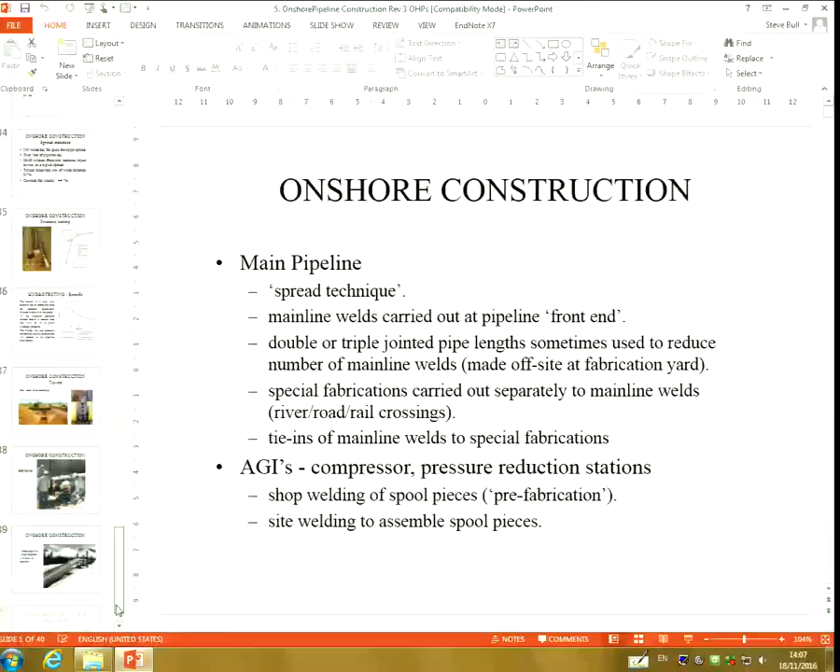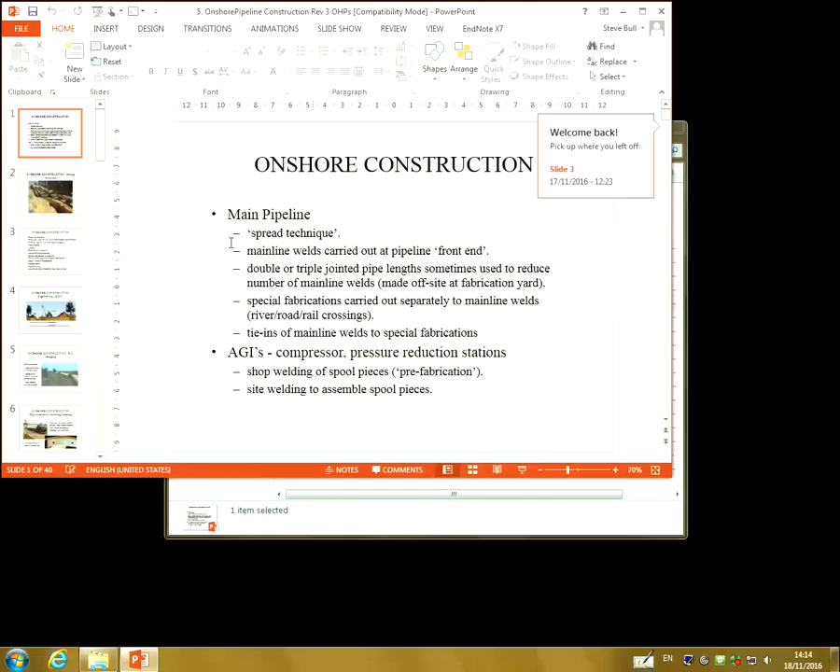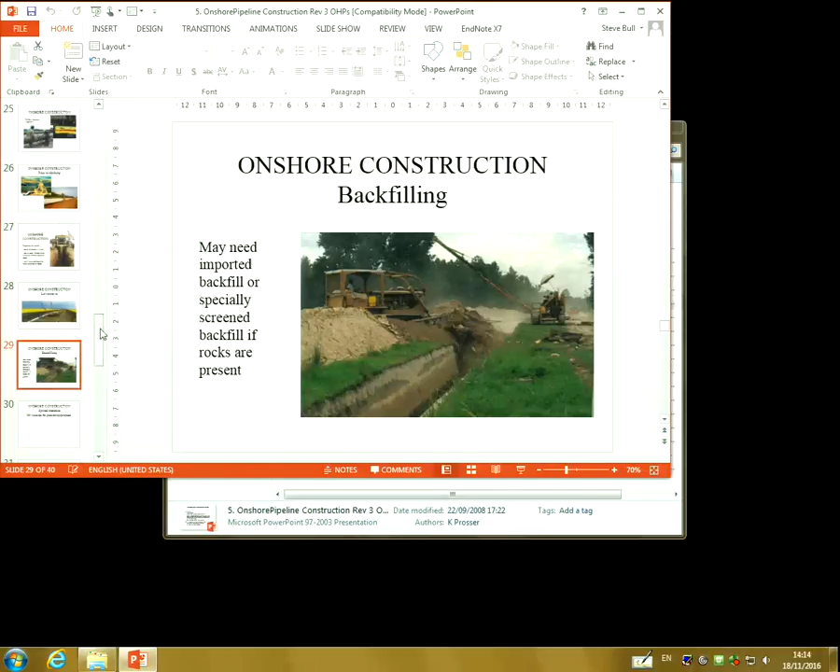I'm struggling. What I'll try and do is sort of get through it with this thing, and I'll sort this out. But by the time I phone the AV people now, they won't come and fix it. I want to try and get a few things said today, at least.

So we talked in the previous lecture about making pipelines, and the last thing that you want to do is pressure test them. Now you don't pressure test the whole pipeline, you pressure test them in segments, and they usually pressure test when they're in the trench, when most of the pipe has been backfilled, and there are a few overlaps because you have to weld on end caps to maintain the pressure inside the pipe, and then those when the pressure testing's been done, those will be cut and joined to make a single pipeline afterwards.

So it's an on-site activity, but the pumping activity for the water that does the pressure testing could be miles away from where you actually measure the pressure.

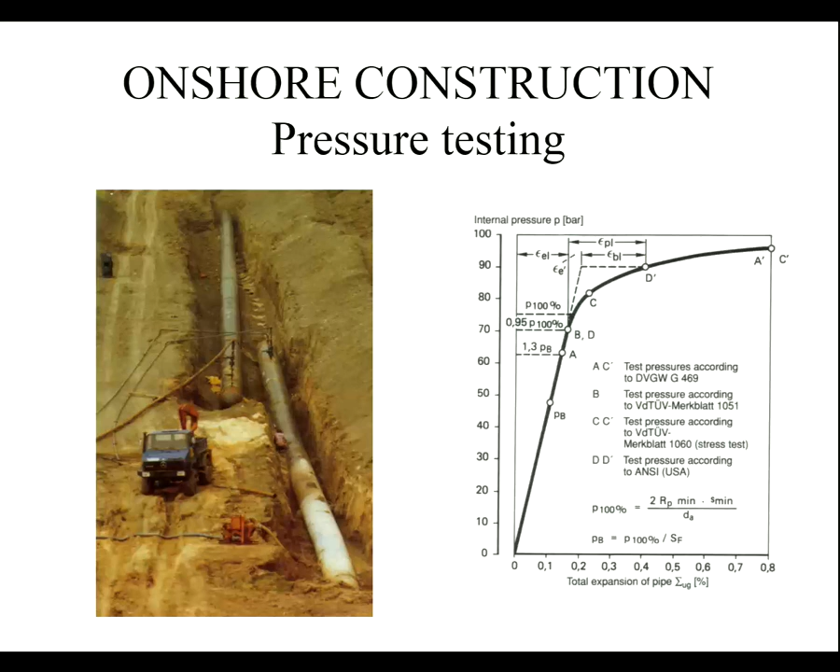So the benefit of a high-level strength test is effectively it takes out all the big defects, because if you fail that pressure test, you have to go and repair it, and then you've repaired it usually with good defect-free welds, so you're not going to get any problems. And so operational failures, which occur later, tend to be much, much less likely. So if you put a high enough pressure test in, that's okay.

So basically, if the pipeline contains defects above a certain size, then you're going to have a failure in the hydro test. And if you repair the system and get it to work, you've screened out all of those big defects. And hopefully that means that if you do a second test, the smaller defects that remain would require a higher pressure to fail.

This graph, if you could see all of it, shows the pressure of failure against defect size, and you can see as the defects get bigger, the pressure is smaller that you need. So PO would be the operating pressure that you wanted to run at, and PT would be the test pressure. If you run at the test pressure, these small defects will actually fail, and anything bigger than that would actually fail.

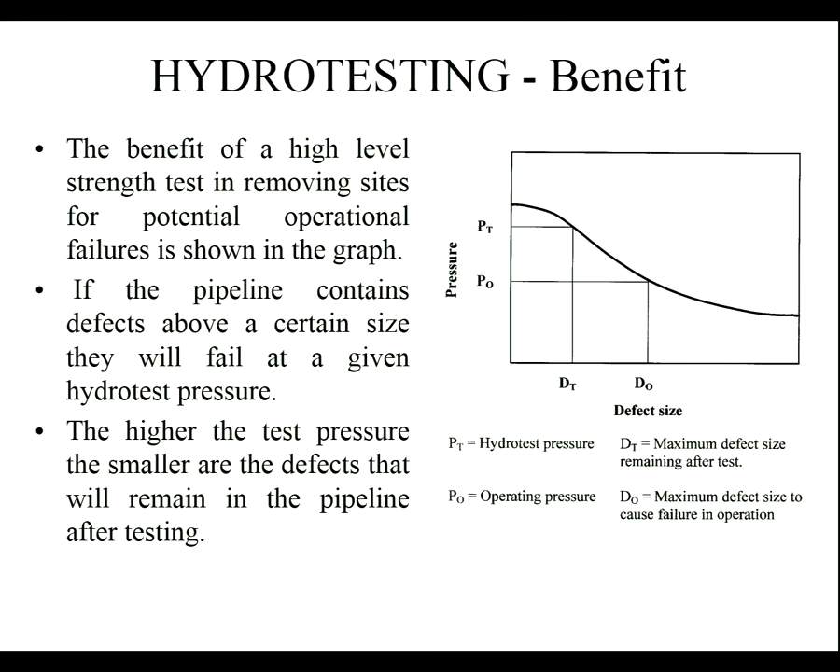So hopefully you've got a set of defects in your operating conditions which are much smaller than the defects that would be required to cause failure under those conditions, if you do the hydro test correctly.

You have to think about different activities when you look at road, rail, river crossings. So this is a road crossing here. You can't usually dig up a road and leave it out of commission for months while you do a pipeline. So normally you put a tunnel underneath, and the pipe segment is inserted in the tunnel and everything's done properly. And then the ends just sit there waiting for the pipeline to catch up.

And you can then have different types of clamps to hold it together. So this isn't an internal clamp, this is an external clamp that can be used to hold parts together, and you weld in the gaps. You can't quite see it in here, unfortunately, on this picture, but you need different equipment for dealing with these tie-ins. That's the point that I'm trying to make.

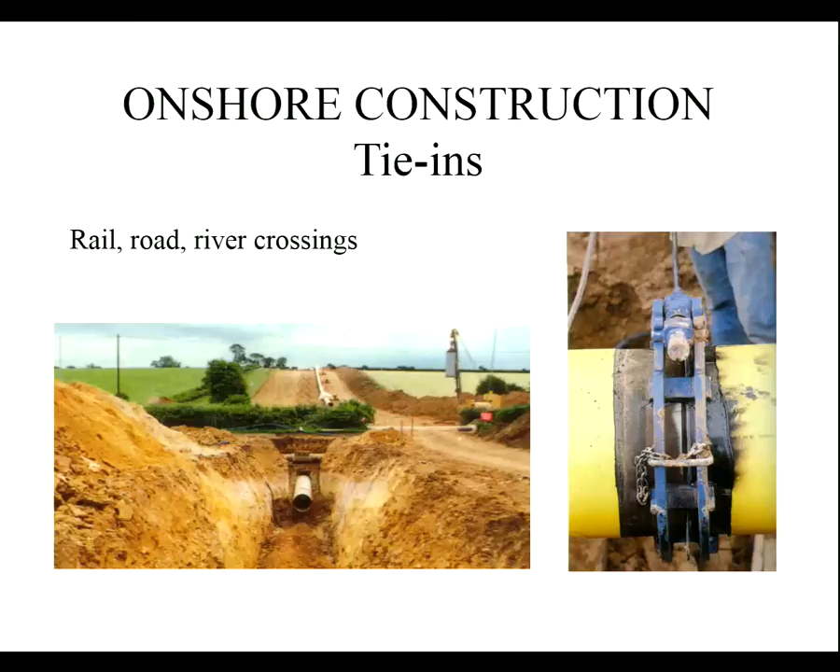Because you can't rely on an internal clamp being pulled all the way through as you do with normal manufacture, you probably wouldn't be able to get it into some of these tie-ins, because sometimes there are bends that you have to put in that are quite sharp to make sure you match up the pipe to the crossing, and the crossings don't necessarily go perpendicular to the pipe. They can go at some strange angle, and it can be very difficult to sort things out.

So sometimes you're putting tie-ins into a pipe and you're actually running gas through the pipe. You may have a situation where in order to maintain productivity you have to connect a spur onto a pipe, and that tie-in may be done with the pipe actually filled with gas. That's a different set of processes completely.

So by hot tie-in, I don't mean to say it's hot while the guys are working there. That means that the pipe is live. And if you do anything to cut through the pipe or let gas out, when you've got flames around from preheating torches and things like that, the whole thing can go bang. So you have to have a very careful team that knows their procedures very well to ensure that happens safely.

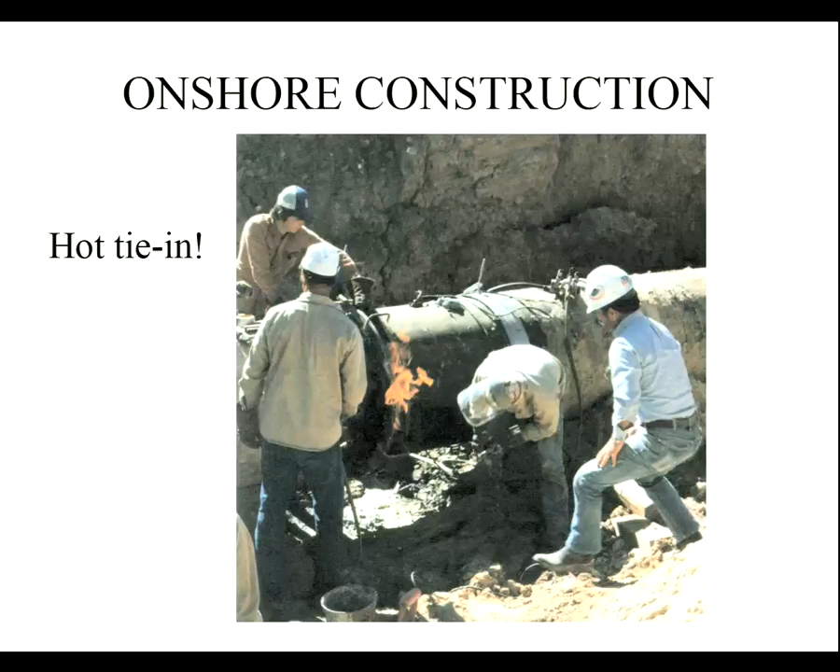In Canada and in Alaska, we can't trench because the ground is frozen solid and the permafrost is too difficult to dig through. So pipes are above ground mostly, and they have to have protection from extreme cold and extreme warm temperatures. So the pipe supports and the externals to the pipe have coolers, and sometimes trace heaters to maintain the pipe in a stable temperature situation.

Cooling is usually more necessary because the product flow through the pipe actually leads to some heating of the material. So you sometimes have to deal with that heat, particularly in hot places, and the fact that you've got good solar gain heating of the material if it's sitting above the ground. So it's the temperature changes which is the problem. It's not so much that the pipeline's at a high temperature or a low temperature, but it might be at a high temperature in the day and a low temperature at night, and you have to have heating and cooling systems that try to minimise that variation. So there's extra facilities necessary for doing that.

We don't in the UK tend to worry, we just dig everything in a hole. Things like the underground temperatures are fairly constant, about 5 degrees I think in most cases. So it's not something that I can tell you much about, but I know it happens.

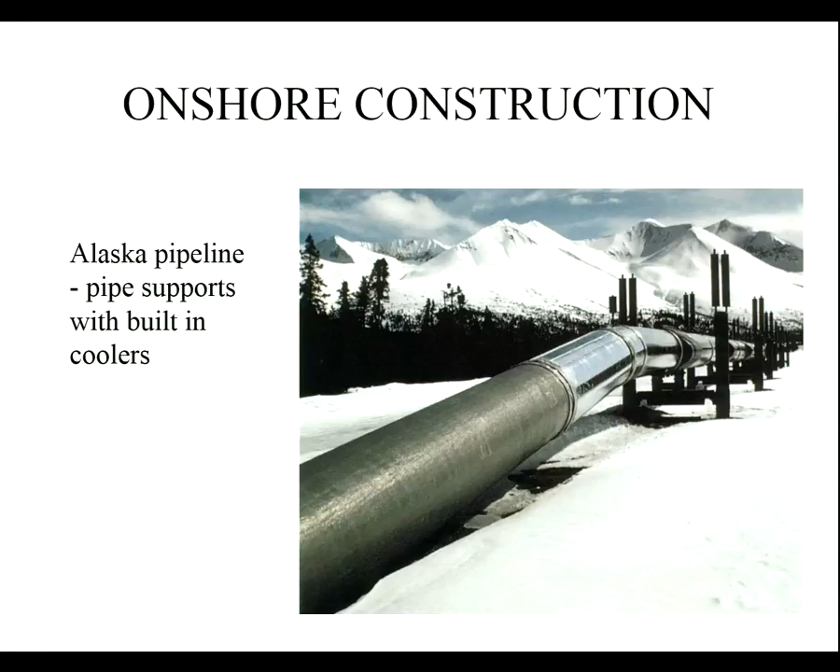And now, if you are able to deliver that long section of pipe to site, and if it's flat enough, and if there's lots of ifs there, then you can do that. These types of processes are much more common in offshore manufacture because productivity is so much more critical in those cases. But imagine if you've got a complete pipe length which is 3 times as long, then you've got 3 times the productivity when you're on site because you can do the same number of welds per day, and some of them have already been done.

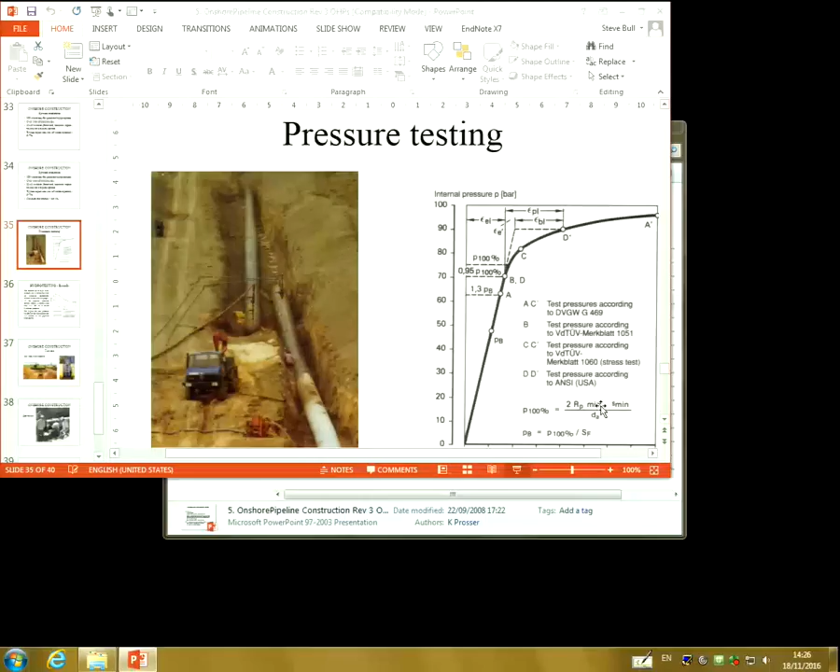Okay, so that's the onshore pipe construction. What I want to go on to talk a bit about is the welding processes that are needed in a bit more detail.

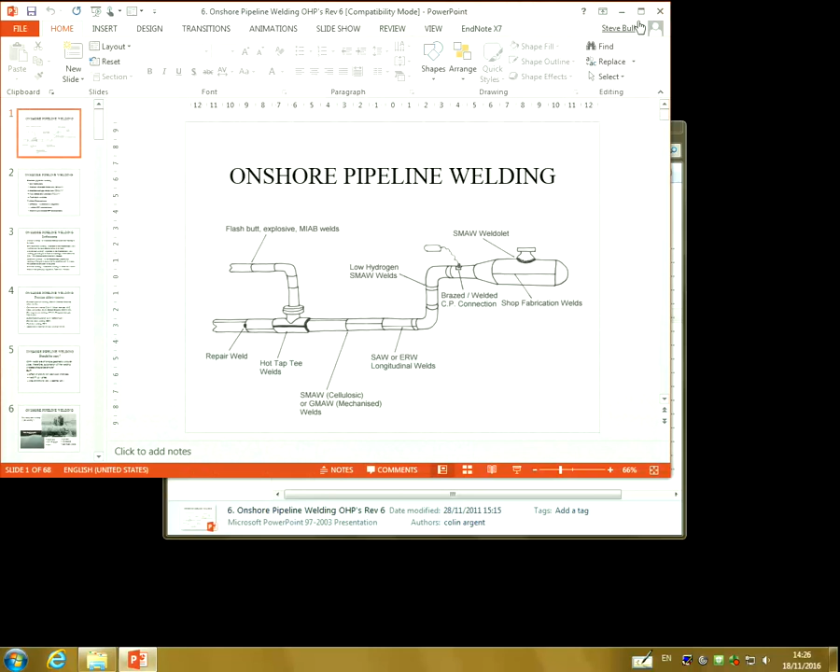Now we're losing about an inch off the side of the slide. I'm sorry, I'll read what I can for that, but it's the best I can do at the moment.

We have lots of different welds to make a pipeline. Lots and lots of different welds. So you've got our longitudinal welds in our UOE pipe, let's say. We've got the girth welds. We've talked a bit about those.

You've got a hot tap, so you've got welds holding this split T in place. You've got welds holding elbows and joints in place. For some of the smaller tapped pipes, you might have a different set of welding processes, like flash butt welding for instance. You might have perfect welds, and every now and again you've had to do a repair, so there's a repair weld.

When we go out to pig traps and things like that, we have things coming out of the ground which have more variation in temperature, and you may want to be more careful about your welding procedures, so you might have some low hydrogen welds. Then you've got to put cathodic protection attachments on, and those might be brazed or welded. And then there's a weldolet in here - we talked about weldolets in the fittings because we want to get an access port into this pig trap.

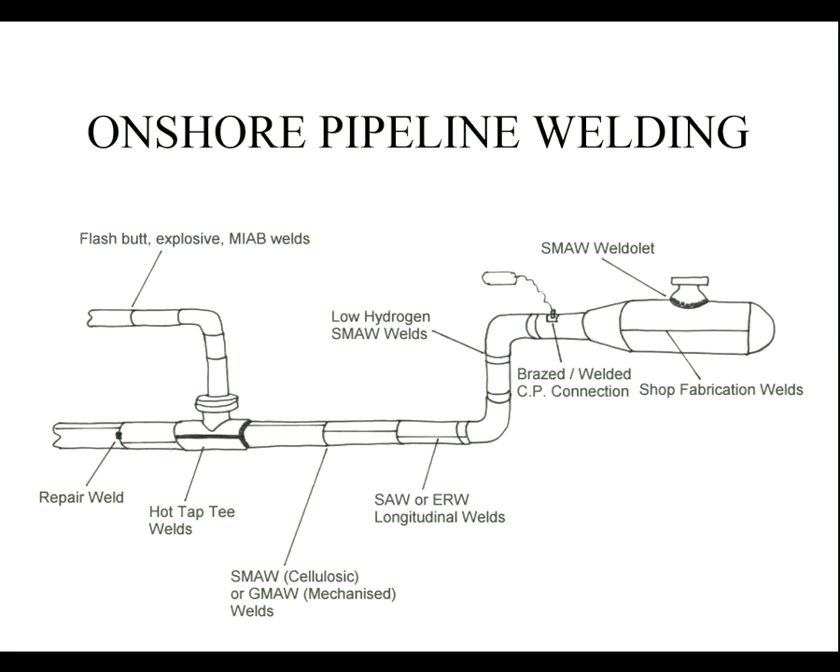So over the years, a number of different processes have been used. Onshore pipeline welding initially started with simple oxyacetylene torches. Acetylene has got the highest energy content of all the gases available, so we can get the highest heating of a material from an oxyacetylene torch compared to any other gas used with oxygen. But you still can't really heat thick metal up - it's only suitable for rather thin metal systems. So nowadays oxyacetylene is used largely for preheating in the industry rather than for actually welding.

Manual shielded metal arc welding, manual metal arc welding, stick welding - that is the common on-site welding technology. It can be mechanised, but not easily. But there are mechanised gas metal arc welding systems, so that's gas shielded metal arc welding or MIG welding in this country, where you have a gas cylinder that you have to take with you that provides the protection. The manual systems, the stick welding, it's the coating on the stick that provides the protection of the weld, so you don't have to carry a gas bottle with you.

Sticks are relatively short, so long - when you've welded that material, you've got to eject it and get a new stick. So those welds have start-stops in them, and that's not so good. So flux cored arc welding was designed to have some of the benefits of the mechanised gas system without having to have a gas supply. So you have a tube of weld metal and you put the flux that provides the protection on the inside of a tube, and then you can wrap that up and feed it like a wire into the process.

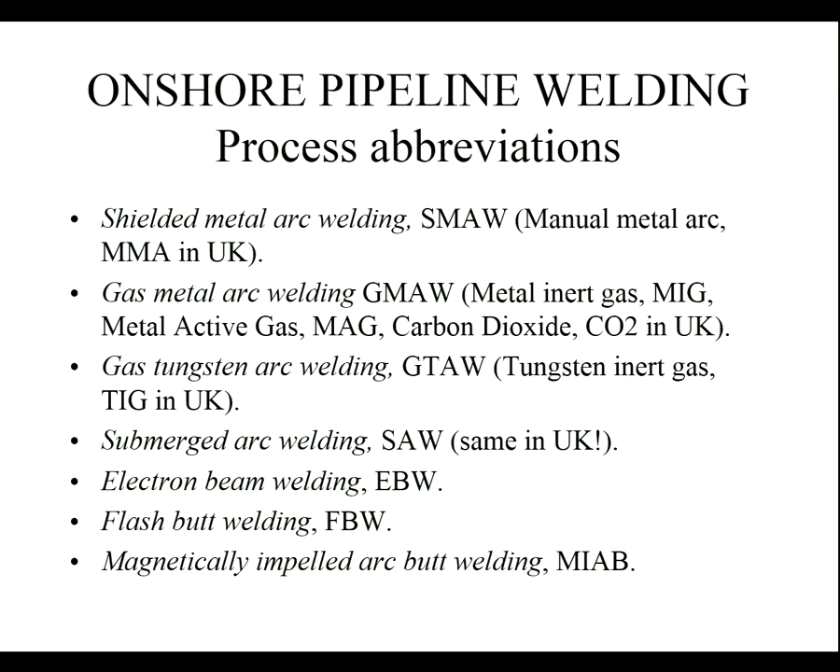Okay, again I'll have to read what's off the edge. Onshore pipeline welding, we think it should be easy, shouldn't we? I mean, welding's been known about for years, we've solved all the problems with welding, we know exactly what to do. And therefore, if we know exactly what to do, we should be able to automate it very easily, shouldn't we?

I mean, we know what the problems are, we know what the targets are. There are many, many manufacturers of welding equipment. They should be able to come out with a solution every time.

So what are the problems? Well, the problems are largely to do with not the welding process, but everything else. When you actually set up a lot of welding processes, you weld down onto something with a weld pool, which you can look down onto. So the weld pool is held in place by the material around it.

Now you're welding one of these pipe ends, you're welding downwards vertically. So you've got to worry about the effect of gravity. And whether you weld upwards from the bottom or downwards from the top makes a difference.

What about fit up? If you put two pipes together, if they're nice and close and everything's perfectly spaced, welding is straightforward. What happens if the pipes are canted like this, or if the gap between the pipes is bigger? Then you've got problems in actually doing the welding. And you can't guarantee when you're manually handling these pipe segments that you can get perfect alignment every time. And every pipe is different because they're made in a batch process. They're not made to an absolute standard. They are made to pass a minimum standard, but there's no maximum to that standard. And site conditions vary.

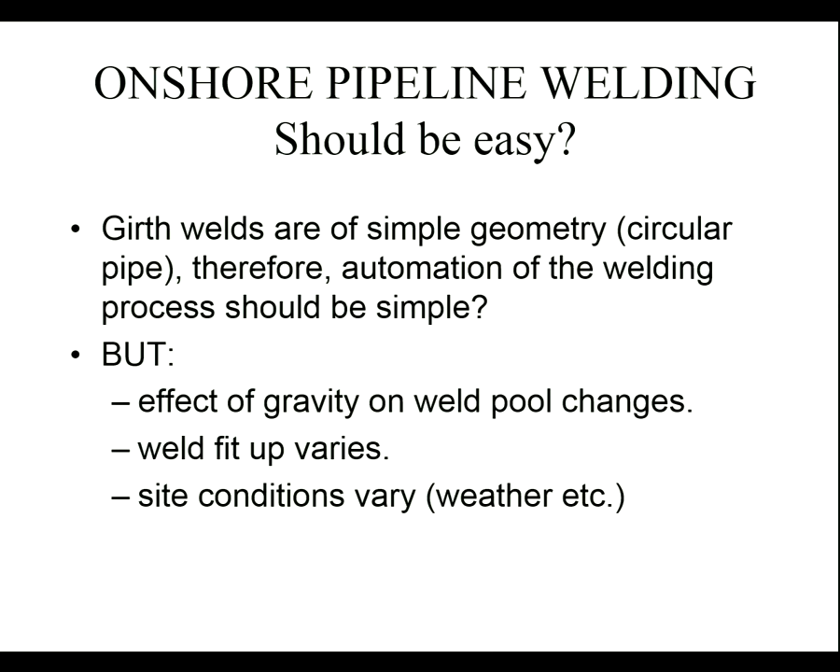But you're buying 6 inches of extra pipe for every pipe segment that you do, and if you add up the amount of extra metal you bought just by doing that, that's a hugely expensive process. And it's much more difficult to line up and get everything in. The welding might be quicker, but the processes were not very good.

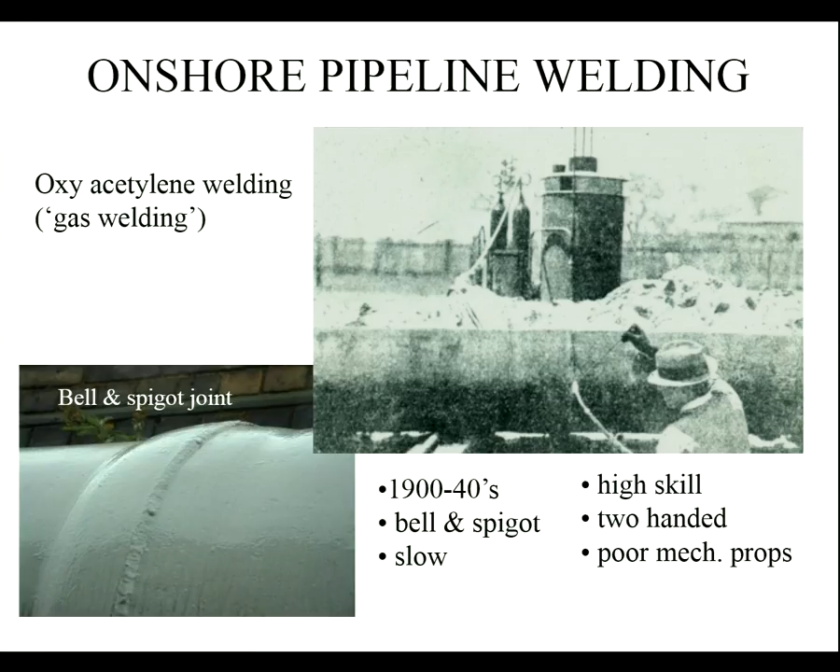Water pipes - sometimes people in the industry say, oh, that's water pipe material, or that's water pipe welding, and that's the way of saying, that's not very good, I'm looking down on you. So gas engineers look down on water engineers, usually. Whether they have any right to, that's another matter.

And you have problems with those welds. A very common defect in welds is lack of fusion. You can see that lack of fusion defect there. What does lack of fusion mean? You put the two parts together, you make the weld, and the weld wanders too far away from one of the two parts, so you don't heat it. So it doesn't melt and doesn't fuse with the weld pool. It looks a bit like a crack, but it's really a processing defect - it's not a crack, not a sharp defect like a crack. But that has to be repaired because there will be a leak with that.

And the other one is undercut. So here's a good weld. And then this welder had a wobbly, and the weld, instead of doing what you normally do, there's a manipulation of the weld, sort of like this, going down there. And then the welder's gone - probably because they're bored. What's happened is all the weld metal's been deposited on this side, and we get an undercut here, so this part of the weld is not filled up. Then the weld tends to improve a bit afterwards. I saw one welder yawn and got a lovely undercut from that, so you can tell exactly what happens there.

So you don't tend to employ welders for their ability to do complex things. You employ them for their ability to do the same thing the same way again and again and again. I could never be a site welder because I would be so bored with the process after about 20 minutes that all my welds would be awful.

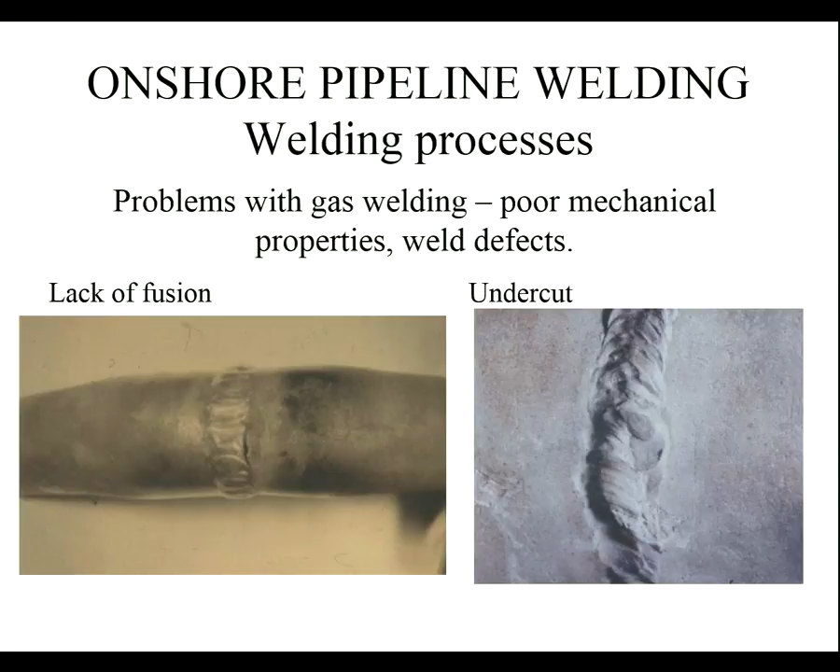Okay, so the stick welding, shielded metal arc welding, manual metal arc welding process - call it what you wish - came into the industry in the 1950s and it's still used today.

For on-site welding, this is what you want to do. We call it stovepipe welding. Stovepipe welding basically involves two welders at the top of the pipe, one welds one side, one welds the other side, and you weld down and meet at the bottom. The one at the top starts a bit before the one on the other side, so that when he gets to the bottom, the other welder can be out of the way. Because you don't want two welding torches coming and touching - that's definitely a disaster. So it's quite a skilled process still.

You can see this guy here, he's got two-thirds of the way round. See that stick is still a little bit long - he's got to weld right underneath, and in the end he's welding underneath the pipe. So he may be almost on his back, certainly on his knees, actually finishing that thing off. This is not an easy process to do, and if you're kneeling in the mud, it's not a clean process, it's not a pleasant process as well, so you need to be able to do that.

It's a very fast process. We used initially welding rods covered with cellulose because that gave good hydrocarbon gas that was protective against oxidation of the surface, which is what you wanted. It's a very fast process - you can make the wire bigger, put more current through, deposit more metal. A bit less safe, but you can do that. It requires high skill, and you cannot do most welds in a single pass. Generally there's a root pass, a hot pass, some filling passes and some capping passes - maybe as many as 10 passes before you actually have the whole thing complete.

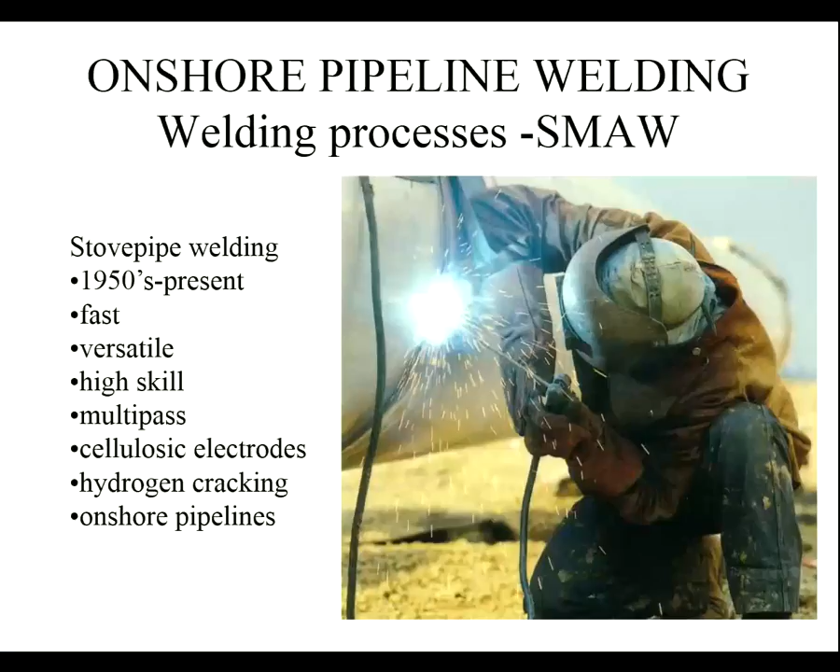So finally, I'll just give you the schematic of the shielded metal arc welding, manual metal arc welding process. What you have is a gun, an electrode holder, which usually has a spring-loaded clip, and that spring-loaded clip can hold on to the consumable. The reason it's spring-loaded is at the end, when you want to get rid of the end, you want to eject it - you squeeze the clip and flick, and you can throw the used rod away because it's hot. You don't want to handle it with your hands. Then you can insert a new rod in. That's connected to the power supply, and the power supply then connects to the return electrode, which has to be clamped somewhere to the thing you're welding. So there has to be a return path.

You bring the torch, the rod, onto the surface, current flows, and then you withdraw it a short distance from the surface, and that current flow, which is by conduction, turns into an electric arc between the end of the rod and the surface. If you're good at it, you can do that first time every time. If not, you have to touch it loads of times, and you end up with arc marks all over the place. There's a skill to knowing exactly what you need to do.